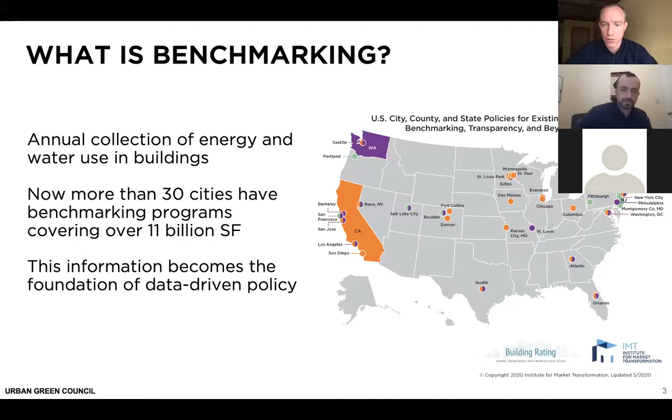So in New York, the Greener, Greater Buildings Plan set up New York's benchmarking program through Local Law 84. So 2010 was the first year that buildings submitted their data. And at first it was just large buildings, so those over 50,000 square feet. And within the first 3 years, it was actually shown that benchmarking drove a 6% drop in source energy use. So that actually doesn't come from our report. That comes from a fairly rigorous and controlled study you can see in the link below.

But it gets to the other reason why we benchmark. Not only can this information be used to develop other climate actions, but it's a climate action in itself. Just by raising awareness within the building, managers, operators, and tenants can make changes.

So now, benchmarking in New York City has expanded. It's going down to 25,000 square feet. And coincidentally, there are now about 25,000 properties that reported last year. And that's over 3 billion square feet. So if you recall, the other number was 11 billion square feet. That makes New York City the biggest city that does benchmarking in America. And in fact, that sum is larger than the benchmark area in Los Angeles, Washington, Chicago, Kansas City, and Atlanta combined.

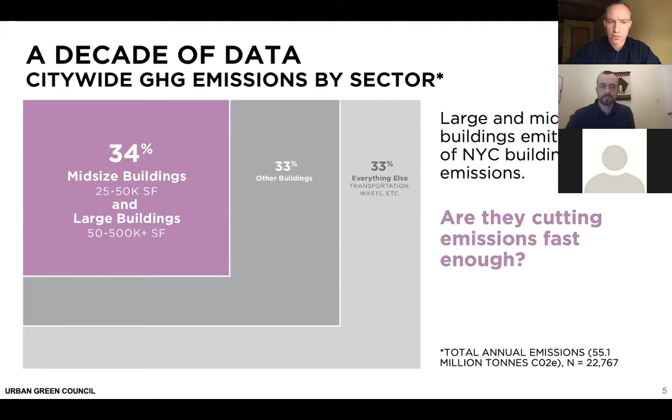So here's one of those first graphs that you'll see about the emissions related to benchmark buildings. So the rectangle represents citywide emissions. So a lot of this data comes from the greenhouse gas inventory. The purple are the emissions from mid-sized and large buildings in 2019. So they account for about half of the building emissions overall, or a little over a third of the citywide emissions.

Now, the other buildings are, of course, the small buildings, those under 25,000 square feet, and the light gray are the transportation emissions. Now, putting this into context, it's the first time we could assign this proportion to mid-sized and large buildings. It's also really important, though, because a building that's required to benchmark is likely also covered by Local Law 97. So now we get a sense of the potential behind that law. Now, the obvious question to ask next is, are these buildings cutting their emissions fast enough?

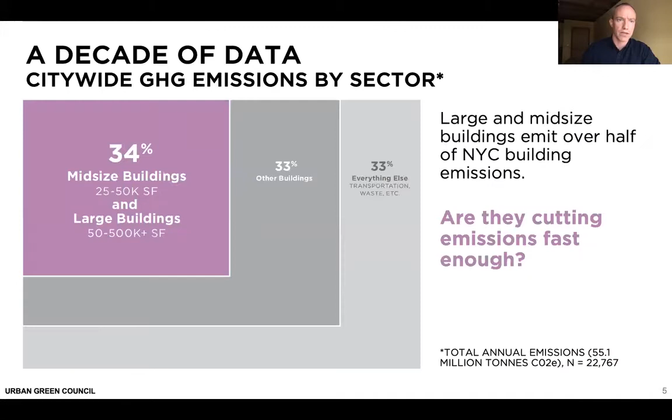Now, over the last decade, consistently benchmarked large buildings cut their emissions by 23%. So that's great news. And when I say consistently reported, what I mean is they only missed one of those years out of the last 10. So they reported 9 out of 10 years. Now, that's about 3,000 buildings. So it's a sample, but we really like looking at that cohort to give us some consistency, and it rules out the noise that might come from new construction, demolition, and reporting inconsistencies.

But if you look at the median greenhouse gas intensity across the entire data set for each one of these benchmark years, that emissions drop was also in the 20% range. So the consistently benchmarked set is a fairly good representative sample.

So we found three big factors in this 23% decline. Number one is fuel switching, and that was driven by the Clean Heat program, which you're probably familiar with, which stopped the permitting of heavy fuel use in 2015. So that's about a quarter of the drop, and I'll go into more detail about that one later. But a lot of those boilers and burners were actually swapped out to use natural gas.

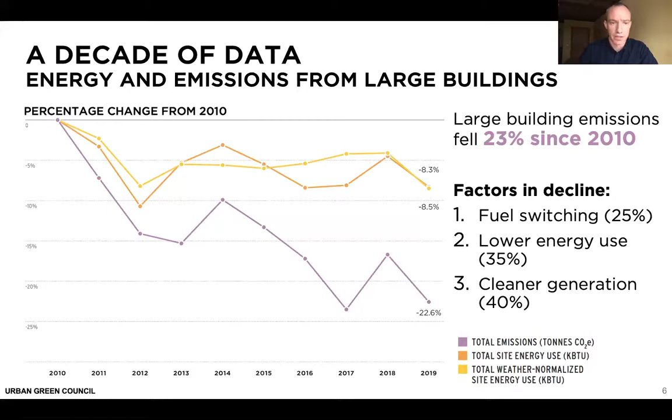After 2010, so over that decade, large buildings accelerate, and that's based on the benchmark data. So they were able to cut about 2.3% of their emissions year over year, and that is really getting them close to the small building emissions. In fact, today, they're a little bit larger than small building emissions, but we expect that in the next 5 to 10 years, that could actually flip-flop. So it's really encouraging news for benchmark buildings. And that decline is slowing, but they're still on track to hit 40 by 30, in fact. So it's expected that the rate of decline would slow.

It's kind of like training for a race. The first minute you shave off of your mile time is always going to be the easiest, and you get there the fastest. The last minute you shave off your time is going to be the hardest. But new policies like Local Law 97 and of course cold weather heat pumps could give us the acceleration we need to get large and mid-sized buildings to that 80 by 50 target.

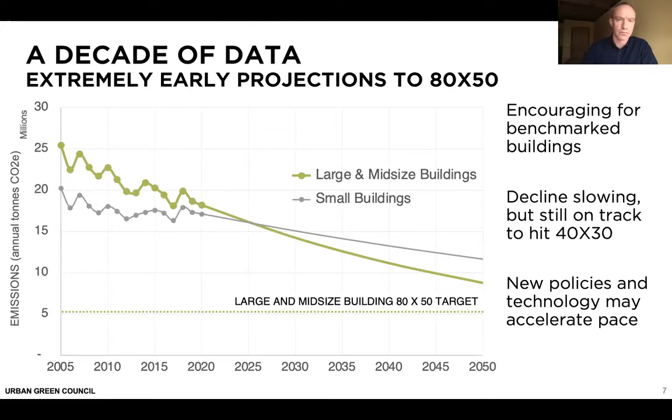So this is all about fuel use intensity. And what we see for multifamily and hotel properties are the fuel use intensities dropping over time. So that is partially attributable to technology, new systems, better systems, retrofits, new construction. And that's kind of what you see in the modern declines. But when it prevails over to the next era, we really feel that energy code probably played a pretty big role here. And the new multifamilies, those built in the last 7 or 8 years, use 57% less fuel per square foot than the pre and post-war multifamily buildings. So great news and really encouraging for energy code as well.

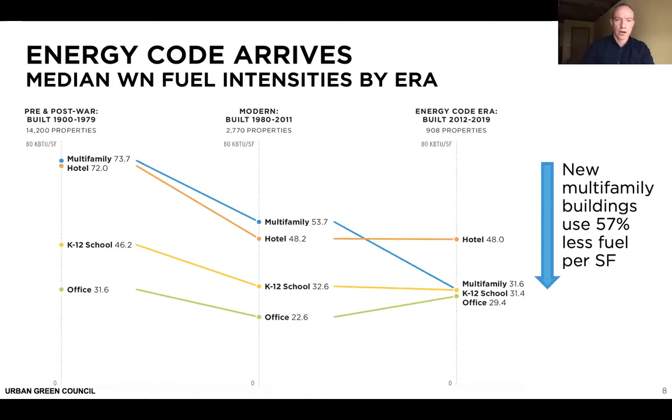The next one, circling back to the Clean Heat program, it looks like our large buildings have made a huge shift to gas over the last decade. It is now the largest energy source in the benchmark set. So the Clean Heat program cut heavy fuel use by 99%, and just 89 properties are still using it in the midsize and large category. Most of those buildings, I think 2/3 or 3/4, are located in the Bronx and Manhattan. So natural gas use has nearly doubled over the last decade. Actually, electricity use has fallen, and a lot of that I would attribute to the efficiency and the drops in site energy that we saw.

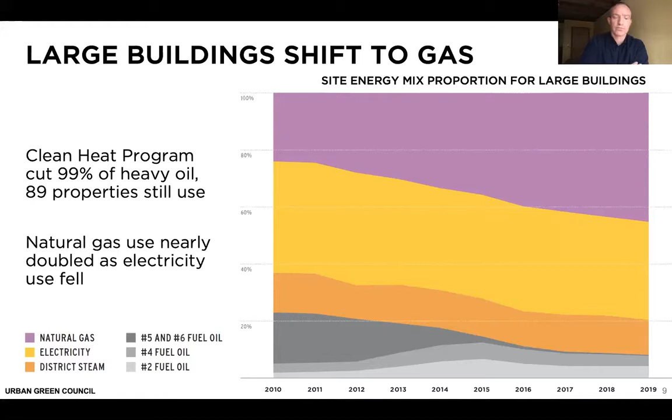So that was the decade of data. And now we're going to talk a little bit about some of the new things that are in this report. So mid-size buildings are those between 25,000 and 50,000 square feet. They started to report their energy use from 2017. So we now have 3 years of data for them. And I got to say the data quality has really improved over those last 3 years. They now are hitting an 85% compliance rate. So we have almost 10,000 mid-sized properties that reported last year. And of course, not a big surprise, most of those, 3/4, were multifamily buildings.

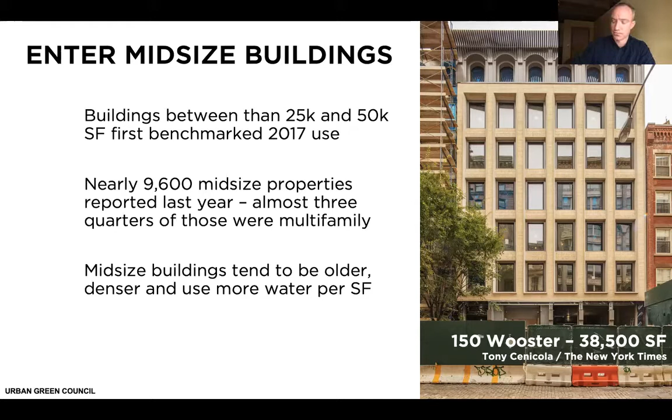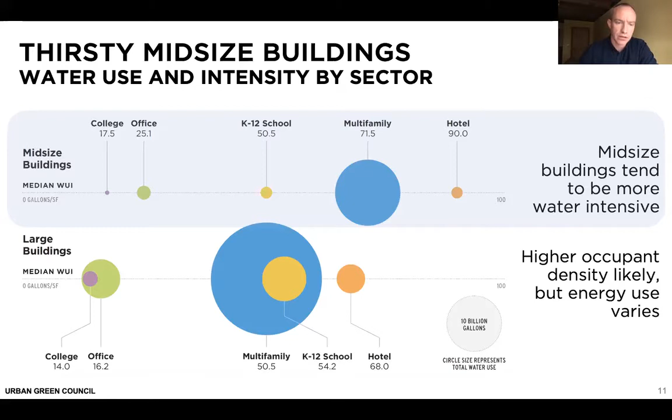Now, some of those building sectors also have data associated with occupants, like multifamily buildings. And so we saw that the mid-sized buildings tend to have more bedrooms and apartments packed into those buildings. Now, the energy results, as you can see in the report, don't correlate quite as strongly, and so they vary sector by sector.

Another new element in New York City, as well as our report, are the building energy efficiency ratings. So these labels, which are grades A, B, C, D, went up in lobbies in October, and they're based on Energy Star scores from 2019. So offices, you can see in green, did really well. Half of them earned A's and B's. Multifamily buildings have some work to do. About 70% of them got C's and D's.

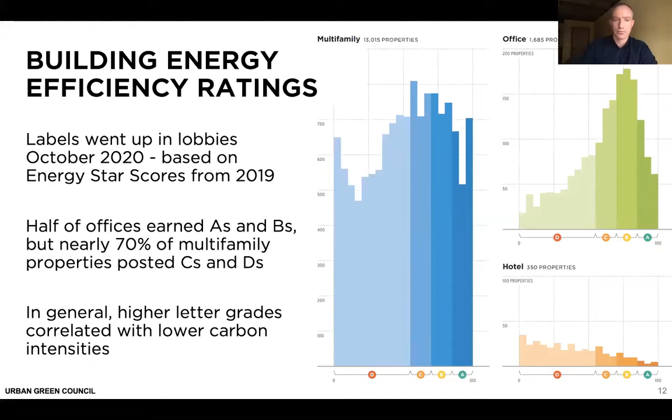But in general, we found that the higher letter grades corresponded with lower carbon emissions. So even though the energy labeling law is not directly associated with the building emissions law, they do correlate. So that's the final piece, is checking in on Local Law 97 and how much work we have to do over the next 3 or 4 years.

And interestingly, there was a water intensity difference, but there's also an emission intensity difference with mid-sized buildings. And so if you look at just the mid-sized buildings within a sector, it's closer to 30% of those properties that will have to do something to get under their 2024 cap. So just like the 80 by 50 projection, it's pretty early to start talking about carbon limits with Local Law 97. A lot of energy efficiency could happen between now and then. And we certainly hope that that happens.

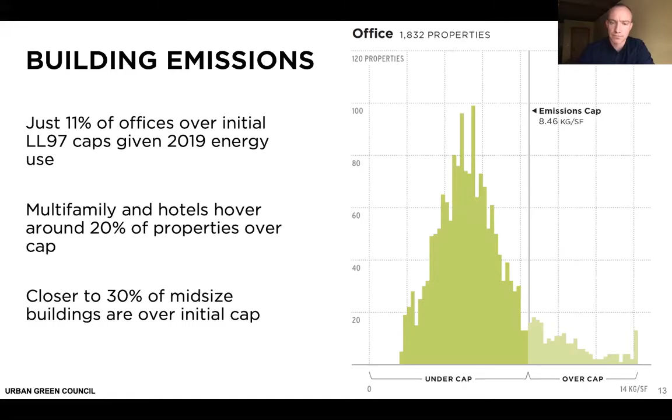Thank you very much. And I'm going to pass it over to my friend and colleague, Ross McWhinney from the New York City Mayor's Office. We're very happy to have worked with him, and it's been a great collaborative project. Thank you. Thanks, Sean. Just let me try to share the screen here. Can you see my front page? Okay, yeah, so thanks, Sean, for walking us through that. That was all, I think, really pretty interesting.

My name, again, is Ross McWhinney. I'm a senior advisor working in the Mayor's Office of Sustainability for about 6 years now. Our office works in service of New Yorkers and our collective future. And in the office, I work on using data to support policy and program development. And I also manage the city's greenhouse gas inventory. So I'm going to talk a little bit about basics of the inventory, some of the more recent findings, and then some improvements we've made to the process.

So New York City has been publishing and updating citywide inventories since 2007, and our reporting base year is 2005. We're actually required by Local Law 22 of 2008 to continue to generate these reports and continue to update the inventory, which is basically a fundamental tool to identify where emissions are coming from and to track our progress in reducing emissions. The sources included in the inventory: stationary energy, which includes buildings, as well as other stationary sources, and fugitive emissions from the natural gas distribution system inside the city.

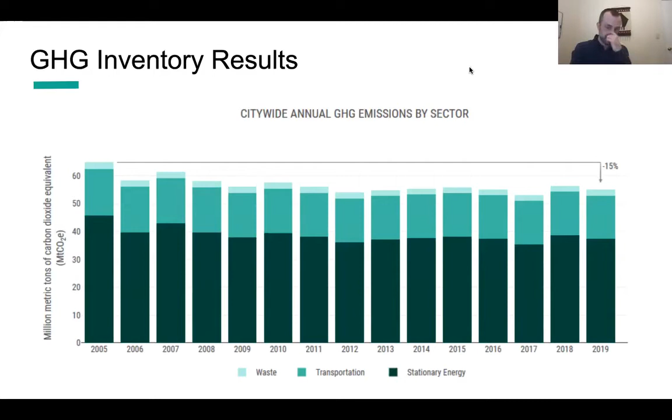I think everybody here is pretty aware, but stationary energy, or rather buildings, is the largest source by far, accounting for 68% of citywide emissions, transportation accounting for 28%, and waste for 4%.

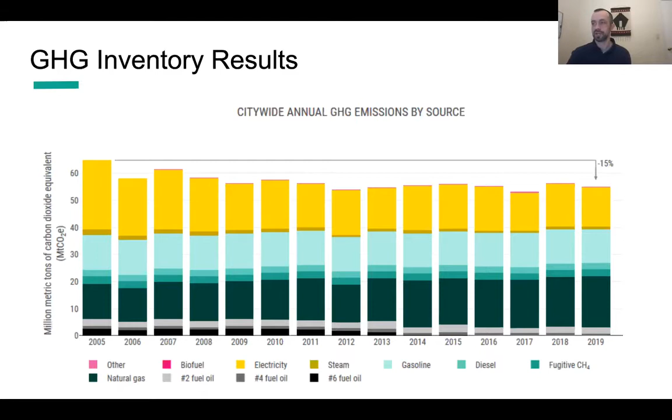And so in 2019 and in 2020, our office worked to improve our process on the inventory, and there are 2 key ways that we did that. The first was an overhaul of how we calculated emissions from our electricity that supplies New York City. So New York City generates its own electricity emissions factor instead of using the EPA's eGRID factor, which is, I think, the more common method.

This allows us to consider the impacts of imported power to New York City from outside of the 5 boroughs. And it gives us a factor each year, right? So eGRID is, I think, on a 2-year cycle. And so we've had this method in place, but we knew it needed to be improved. So we worked with PowerGem, a consultant who's an expert in electricity markets modeling, to reassess how much we weighted the electricity coming from different zones outside of New York City.

So New York City consumes more electricity than is generated in our area, and we needed to assess based on constraints in the transmission system, transmission lines, and just distance, how we weighted different parts of the state. So that was a major part of the work. We also reviewed and improved errors in some of the data, minor things, but did a QA process along the way.

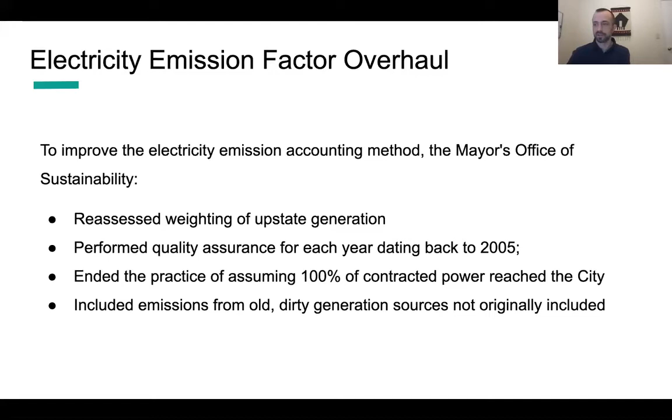And then finally, we included older, dirtier resources that were not originally considered in the baseline because the data wasn't available. So this includes power plants that use tire-derived fuels, waste oil, municipal solid waste, petroleum coke, pretty rare, but quite dirty resources. So all of that, we think, gave us a much more reliable electricity emission factor. And so that was the major drive.

And then we also took a big effort to work with city agencies, so the Department of Consumer Affairs and the Department of Environmental Protection. We worked with Consumer Affairs to build out the list of heating oil vendors that we collect data from each year. So much better coverage of who we're collecting that data from.

And then in 2019, for the first time, we actually issued penalties to vendors who were not submitting data. They're compelled to do so under Local Law 43 of, I think, 2010. And so between those two measures, we think we reached a much better coverage of vendors and also better compliance, better data submission from those groups. And so those are the main improvements to the inventory.

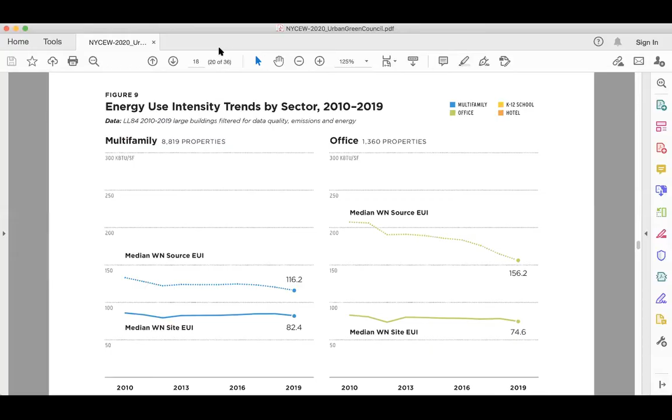Okay, thank you. Next question. How much of the multifamily building property energy decrease is due to tenants as opposed to property upgrades? So, there wasn't a huge decrease in the multifamily sector. But again, we don't know how much is from the tenants versus the base building. But can I share my screen one more time? Yes. Here we go. So this is from the report.

And what you'll see in figure 9 in the report is a comparison between multifamily, office, public schools, and hotels between their weather normalized source EUI and site over time. And so you can see for multifamilies, there's not a huge change for site or for source, certainly not as big as the office change. Now, of course, the offices benefit from using a lot of electricity. And like Ross was speaking to, electricity's gotten a lot cleaner. But yeah, the multifamily sector has not shifted much. It's just in the last couple of years that they really have turned a corner.

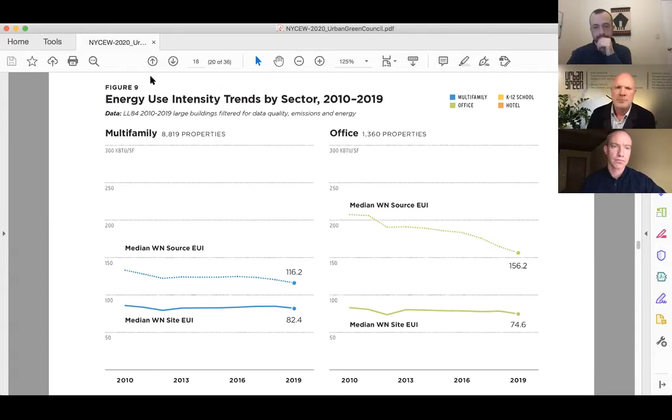Okay. Next question. Benchmarking and the New York City greenhouse gas inventory, both deep dive data reports. What are the top 3 takeaways? I would say from the benchmarking report, it's that we have seen really encouraging results from the large buildings. And it certainly looks like the policies that have been enacted over the last decade, benchmarking, auditing, the clean heat program, have done their job. And so as those policies expand into the mid-sized sector, I'm pretty hopeful that we're going to see some of the same declines there. And then I'm also hopeful about the future for large buildings and the new policies that have been enacted.

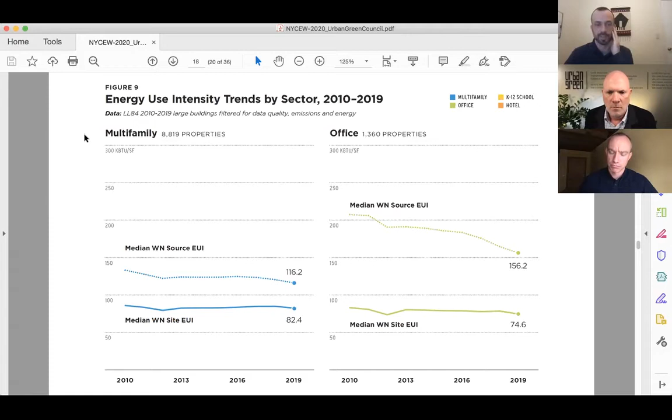And so for the inventory, I'd say that probably the biggest takeaway was an early one, which was the impact of the building sector. And then partnered with a little more analysis was the impact of the large buildings, which is where the Greater Greener Buildings Plan came from originally, including the benchmarking law, and motivated basically all of the work that led to Local Law 97. So I'd say that's the most fundamental. But in recent years, as we've seen a trend over time, the impact of more efficient gas-fired generation for electricity has been a clear trend that we've recognized, and that has, in a sense, been fruit that's been plucked already.

And I think now we're seeing impacts of weather driving emissions year to year. And so we think that actually the hard work is what's in front of us. And not only have the easier things been done, not that that's entirely easy, but the weather, we expect it to get more volatile. And so we're going to have to do more in the face of a greater challenge.

Okay, next question. Are there plans to benchmark buildings under 25,000 square feet? And would this be an effective policy to address emissions in this sector? There really haven't been any formal or even not that many conversations at all about this. I think improved data access would improve policymaking most certainly, but it's not clear that benchmarking is the ideal way to get there. Also, when we talk about going down in square footage, you're going to get diminishing returns in coverage in terms of emissions, right? Smaller buildings emit fewer emissions. So it hasn't been a formal discussion, but those are at least some thoughts on the topic.

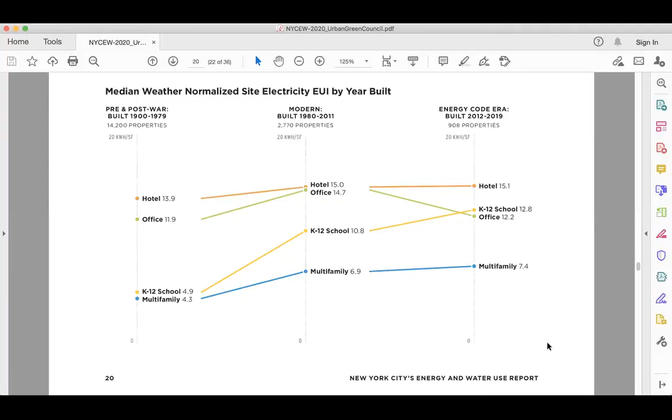Next question, Sean, you showed a chart comparing fuel use over 3 vintage building types to see the significant savings from the stricter codes. Did you look at or see similar reductions for electricity use? Good question. Thank you, Dick. We did look at that. We didn't see the same trend.

So I just shared my screen to look at, again, that figure, but in the report, we have one that tracks electricity use as well. So between the modern era and the energy code era, really not much difference at all. But then between the newer buildings and the pre and post-war, we did see more electricity use.

I don't think that's driven by code. I don't think that's driven by systems not being as efficient. It's just that we're using more electricity to do more things in our buildings. So that's pretty much what we saw. Unfortunate that there wasn't a decline there, but not that surprising either.

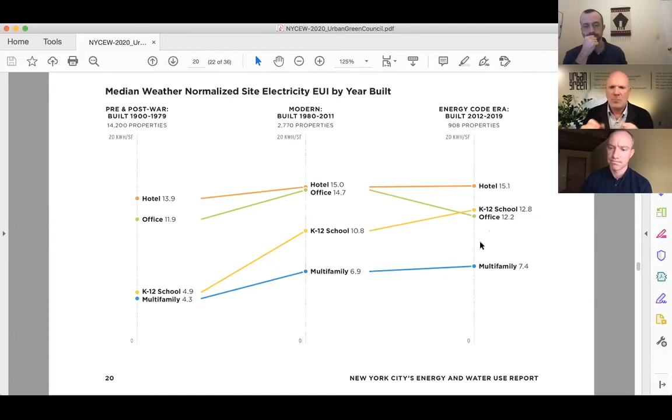Okay, here's the next question about the credibility of the data. So are there plans to have audits of benchmarking submissions for quality, or to require credentialed companies to be submitting the reports? That's an approach I think Chicago pursued, and we'd considered in earlier years.

What we've done around data quality, one thing is that the Department of Buildings started issuing notices and warnings and possibly even violations around really basic data quality issues for people who were submitting in advance of the reporting deadline. And we think that's had an impact.

The other major thing we did was this development of automatic uploads of utility data. So that we believe takes the potential for user error out of the picture to a pretty large degree, the data coming straight from National Grid or Con Ed.

So I think that we have not been discussing an audit, at least not an individual building level audit. It is a feature of Local Law 97, where there are penalties associated with emissions performance. But I don't foresee that being a part of the benchmarking law, at least not so far.